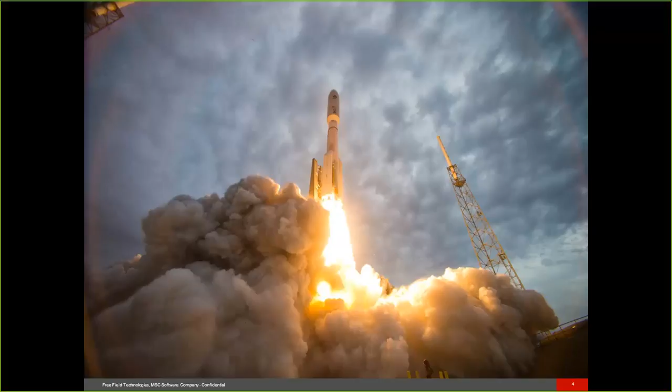The aerospace industry is very diverse, with a multitude of commercial, industrial, and military applications. More and more powerful rockets are required. They are used to reach longer distance or higher lift capacity. And because they are more and more powerful, the sound pressure levels generated at the launch are also getting higher around the vehicle.

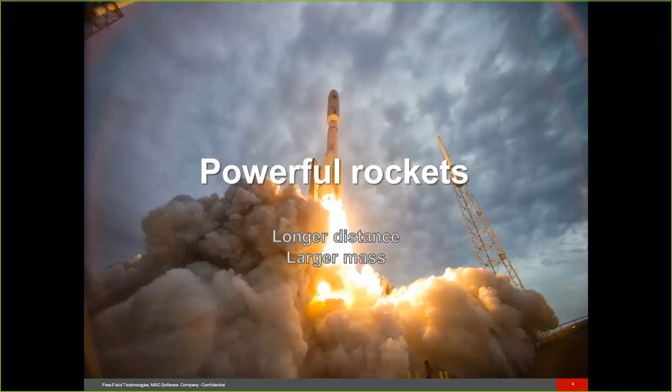Because of that, crew safety is crucial. The very loud sound generated at liftoff can cause permanent body damages to crew members. But it's not only to the human body that sound can cause damage. Louder the sound, higher the risk of damages to the launcher structure or the high technology components embarked. Indeed, the intense acoustic field submits the structure to high vibration levels, structure fatigue, and payload stress.

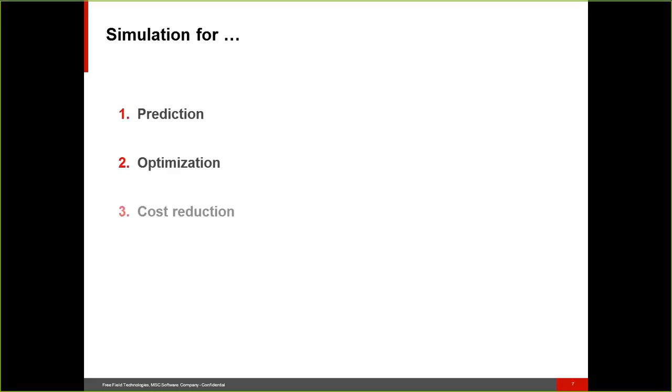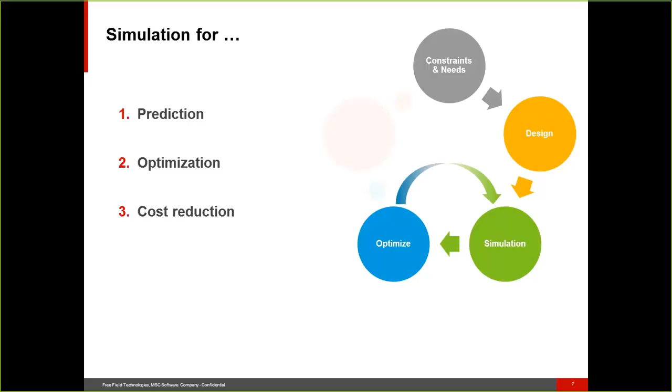The main challenges of the aerospace industry are therefore to model the vibro-acoustic problems and predict the vibration levels of structures submitted to intense pressure loads. In this context, simulation is the required tool for prediction, optimization, and cost reduction, so that for a given design cycle, you can efficiently iterate before the prototype building - a prototype that can now be the right one at the first shot.

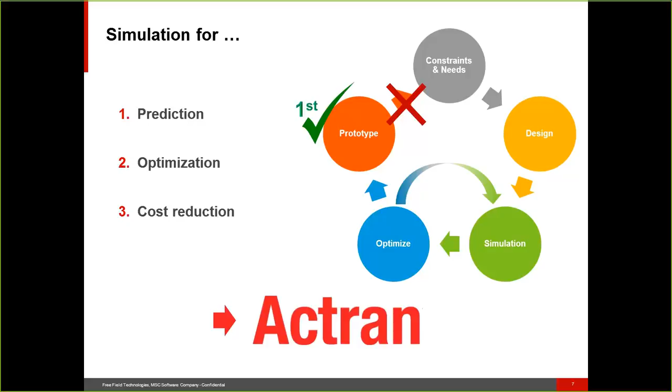Actran is a complete vibro-acoustic simulation software made for helping engineers in these tasks. Let's see how it handles the various vibro-acoustic challenges in the space industry. For each type of external noise source, Actran has an efficient corresponding numerical model.

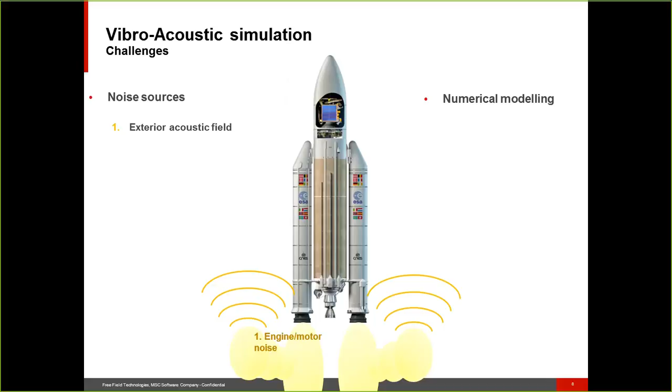Let's consider one of the first exterior sources, that is the acoustic field generated at liftoff due to the engine noise. This excitation can be seen as a broadband and random acoustic pressure. It is equivalent to a diffuse sound field.

The second source of vibration is not acoustic this time, but is an aerodynamic load due to the pressure fluctuations along the vehicle surface. These come from the small turbulent fluctuations in the boundary layer, which are predicted with the turbulent boundary layer model.

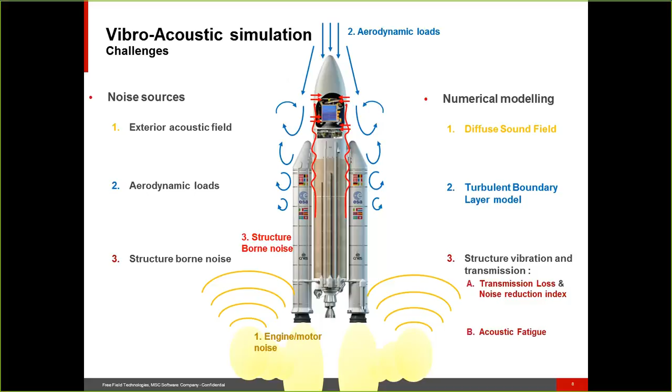Finally, the third type of external source is the structure-borne noise due to the structure vibration and the acoustic transmission. For that purpose, the acoustic insulation performances can be predicted via transmission loss and noise reduction index studies. In addition, the vibration levels and the induced constraint can be predicted and coupled to an acoustic fatigue analysis.

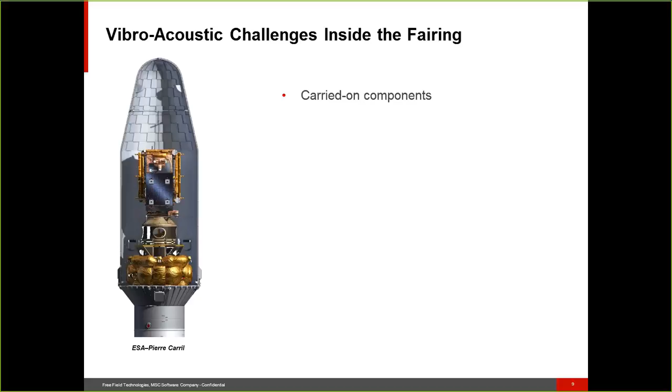But let's go inside the fairing and better understand the situation. The fairing is used to maintain a clean room environment for payload and precision instruments. In particular, it is the location where carry-on components such as satellites are stored. Such components have very fragile parts that are, for instance, antenna or solar panels.

Due to the different acoustic noise sources, a broadband pressure is generated inside the fairing. This broadband pressure is equivalent to a diffuse sound field. In order to correctly and precisely model the behavior of the carry-on component inside the fairing, we have specific modeling challenges. These challenges are the consideration of the installation effect, also named masking or edge effect, and a correct representation of the acoustic environment and loading, that is a diffuse sound field.

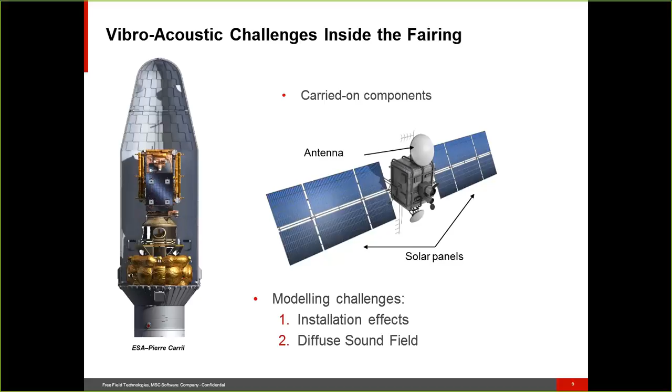The installation effects are related to the complex structure geometry. Because of this geometry, there are external surfaces that are not loaded by the incident acoustic field. To include the masking effect in your simulation, the fluid surrounding the studied object should be modeled.

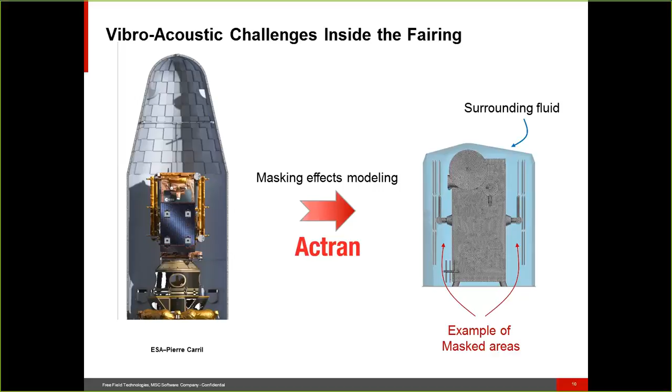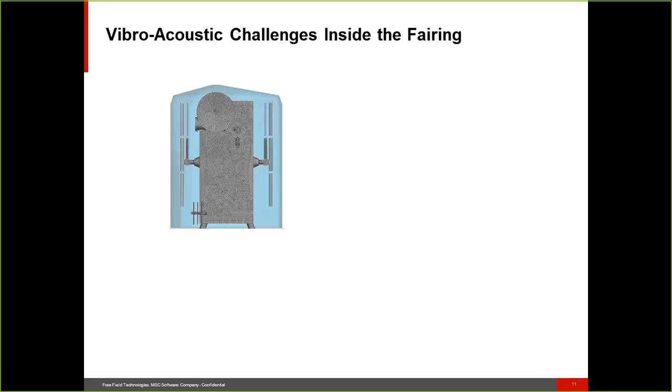We have seen that the broadband pressure inside the fairing is equivalent to a diffuse sound field. This diffuse sound field excitation is applied along the non-reflecting surface and represented by the superposition of a large number of plane waves with different orientation.

The generation of the plane waves is automatically done around the structure and equally spread around the reference sphere. The random character of the excitation is modeled by sampling random phases.

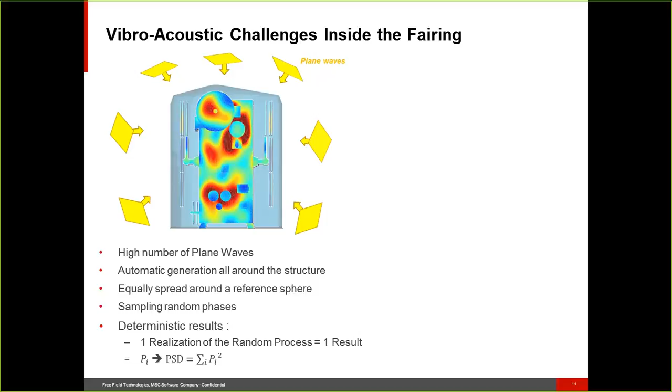The random excitation therefore becomes a combination of different deterministic results for which the phase of the plane waves change. One realization of the random process provides one result, and the PSD values are obtained by summing the square result. The convergence of the PSD therefore depends on the number of samples considered during the Actran computation.

PSD levels from experiments can also be used to define excitation levels. I draw your attention on an important point: only one Actran calculation is needed thanks to the multiple load analysis.

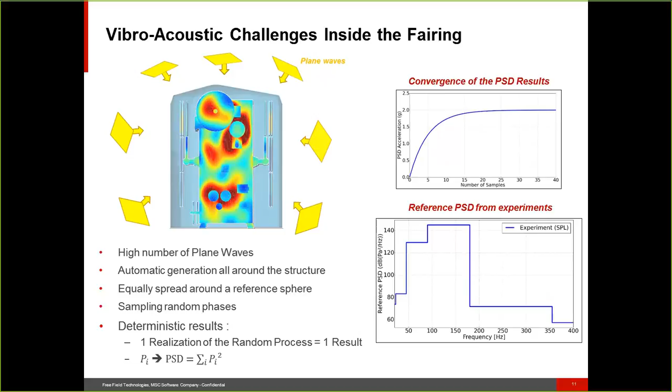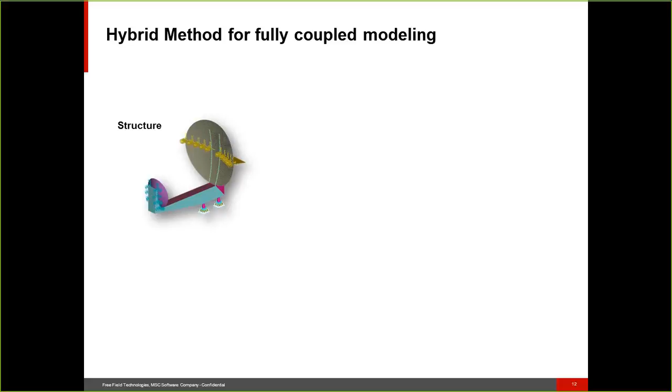The masking effect and broadband pressure modeling are used inside the hybrid method. The hybrid method in Actran relies on intermediate results provided by external tools for modeling the structure. The structure is in modal coordinate system thanks to a first modal extraction analysis that can be performed with Nastran.

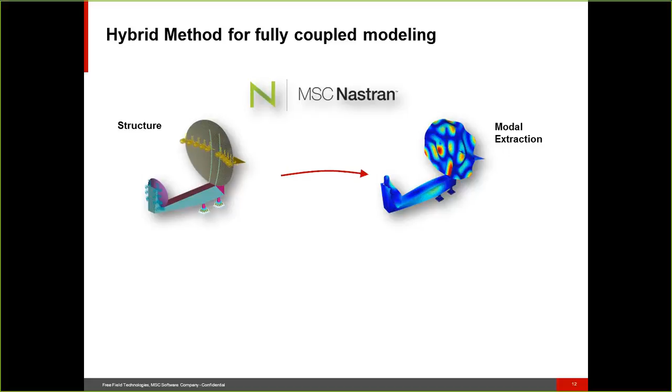The structure model and modes are then imported in Actran, and the model is made more complete by including specific acoustic excitation and components. Finally, a hybrid calculation is performed with Actran for a fully coupled vibro-acoustic study, including a structure in the modal coordinate system and acoustic components in the physical coordinate system.

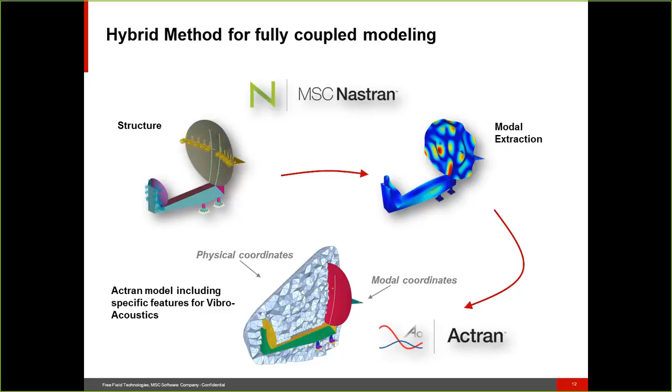Thanks to our automatic and adaptive acoustic components, the exterior fluid is not necessarily meshed by the user. Including meshing tools are indeed available in the graphical user interface and the Actran solver.

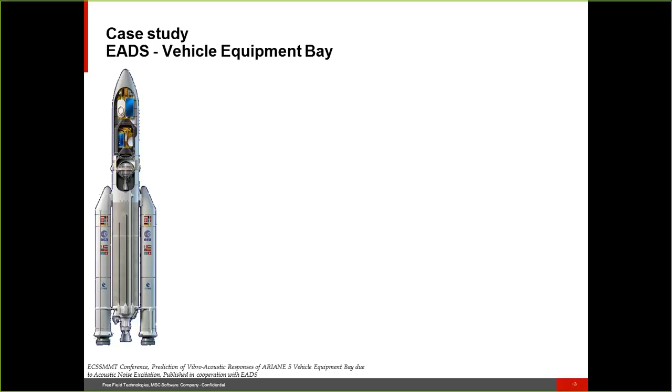This methodology has been successfully applied during different studies. One of them was done in collaboration with EADS, where experimental results were compared with numerical ones. The study consisted in predicting the vibration levels on the equipment bay of the Ariane 5 vehicle submitted to a diffuse sound field. The equipment bay is the brain of the launcher, and any damage needs to be prevented.

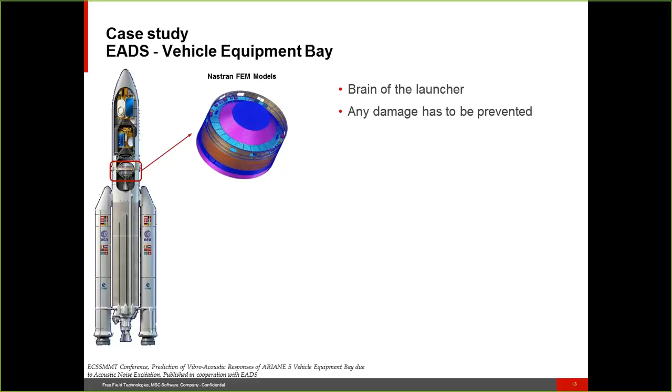A finite element model of the equipment bay structure has been built and submitted to a diffuse sound field. Numerical results were compared with experimental ones, showing excellent correlation over the complete frequency range of interest.

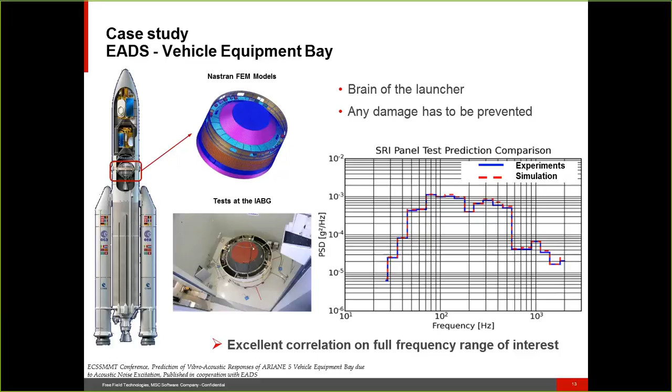The methodology used to study the vibro-acoustic response of this antenna is the hybrid methodology, where Nastran structure model and modes are used to build an Actran model. We will see how the new Actran diffuse sound field wizard eases and speeds up the building of the Actran analysis.

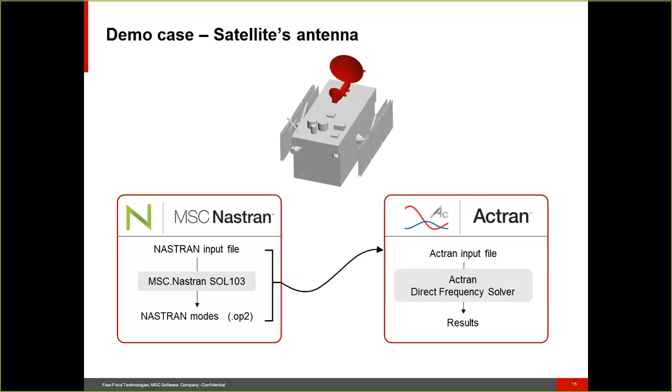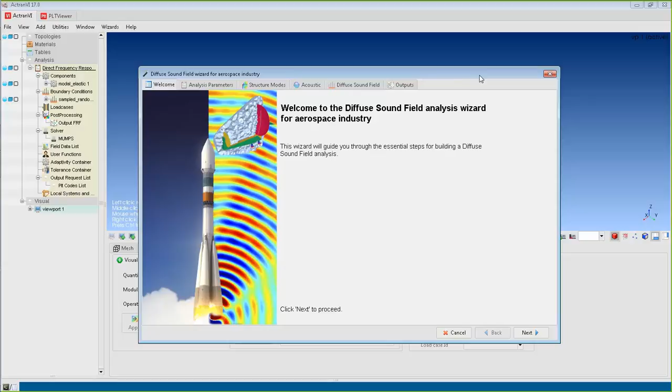So when you are in Actran, to open the new wizard, go in the top menu bar in the wizard section and select diffuse sound field wizard. A window opens and welcomes you to the diffuse sound field wizard for aerospace industry. To start building your analysis using the diffuse sound field wizard, simply click on Next.

The first stage is the analysis parameters definition, that is the frequency used for your computation and the gravity constant that will be used if you ask solid acceleration in G-unit. So in my case, I will define a linear progression of frequency starting at 20 Hz with a step of 2 Hz and going up to 1000 Hz.

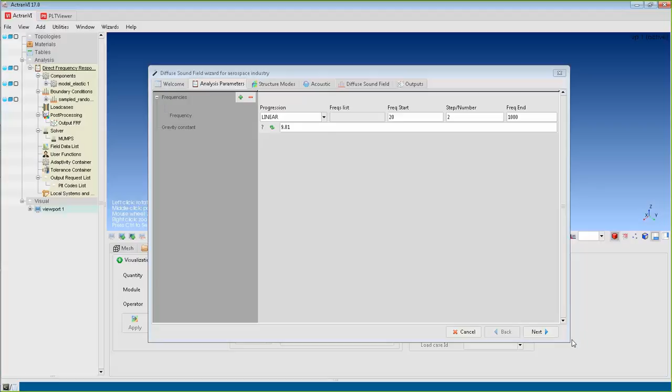Once you have finished defining the first analysis parameters, click Next and proceed to the structure mode definition. In this section, I will provide the mesh of my structure and the corresponding modes that I have already extracted. In my case, I'm using Nastran BDF mesh format, and I need to provide a path to the BDF file.

Once it's done, Actran is automatically loading the structure mesh in the background. In addition to this mesh, I will also provide the modes, which in my case are stored in a Nastran OP2 file, and I will provide a path to this file.

I can then select the number of modes I want to consider in my computation. In my case, I do have 323 modes, and I'm applying a global structural damping over all the modes, using a value of 5%. Once the structure mode definition is done, simply click on Next to move on.

Now we are in the acoustic panel definition. As we want to consider the masking effect, we know that we need to model the surrounding fluid around my structure. For that, I need a closed surface around it.

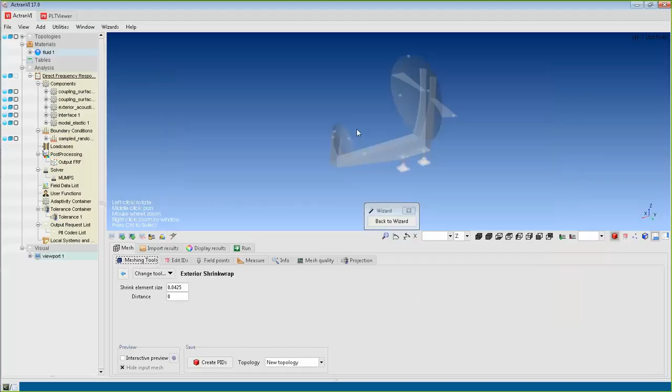To do so, I will use the shrink wrap tool, and I will select New in order to create a new closed surface around my structure. When I do that, the wizard gives me the possibility to use the graphical user interface and its meshing tools. I need to select the structure element around which I want to create my closed surface.

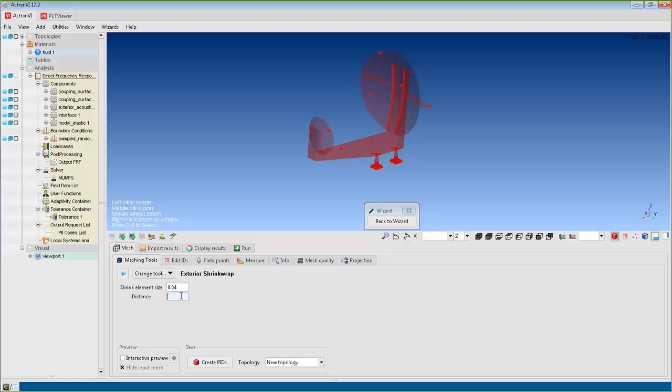I need to specify a certain acoustic mesh size. In my case, I'm using a 4 cm element size. And I need to specify a certain distance between the acoustic and the structure. I will use 1 cm.

Once you have finished defining your parameters, you can make an interactive preview of the results. And if it suits your needs, simply click on Create PID and you go back to the wizard.

Then we need to define the thickness of the acoustic domain, so the thickness of the surrounding fluid around the structure. We will use a 20 cm thickness. I will keep the material definition as it is because my model is in SI units.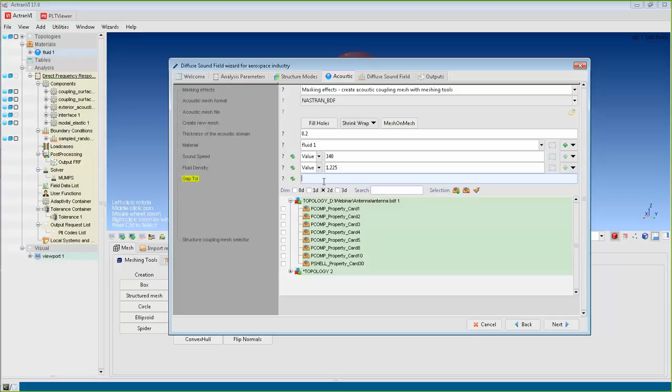In order to couple the acoustic with the structure, we need to define a gap tolerance value. As we have an acoustic mesh distant 1 cm from the structure, we need to provide a 1 cm gap tolerance value. Then you need to select the structure elements you want to couple with the acoustic. In my case, I will select all the 2D element surfaces.

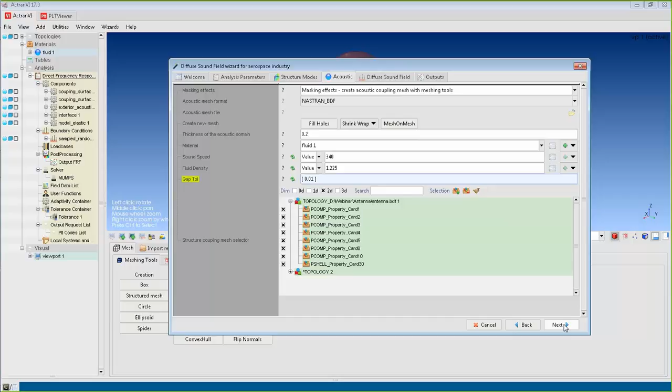Okay, so now we have finished the acoustic definition and we can proceed to the next step, that is the diffuse sound field excitation definition. In order to model the in situ case,

we can define a PSD value by table. In my case, I already have a table in text format that contains all the PSD values as a function of frequency. So I'm selecting table, import existing table. The table format in my case is TXT, but you could use CSV as well. And I will select my PSD table.

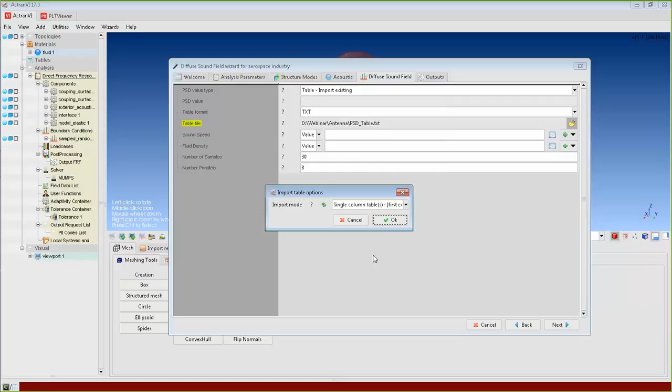In this table, I have PSD values for each octave band defined in dB. So I can keep the interpolation octave. But in order to tell Actran that I'm using dB values, I need to provide a reference dB value, which in my case, as I'm in SI units, is the typical Pascal value. The convention is quadratic because we are using PSD values. I do not need any band normalization.

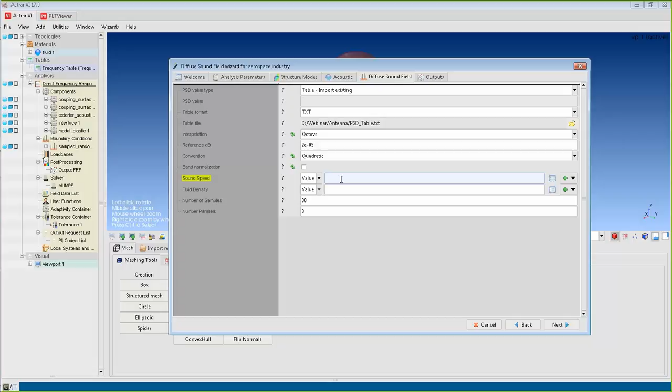Now I need to define the sound speed and fluid density. These values will be used to generate the plane waves in order to create the diffuse sound field. As I'm in SI units, I will use the typical values for sound speed and fluid density.

And finally, remember that we are using a sampling strategy to generate the diffuse sound field. So you need to provide a number of samples, which is 38 by default, and that is enough in our case, and a certain number of parallels that will be used to create our plane waves around the structure.

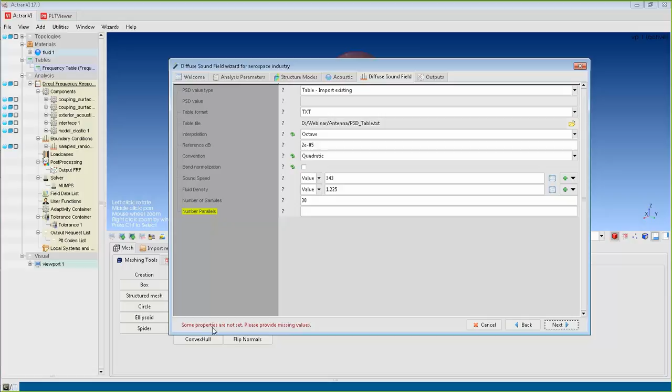For you to know, if you forget to define any of the inputs and you want to move on to the next stage of your definition, you are blocked by the wizard. The wizard tells you that some properties are not set and missing values need to be provided. So in my case, I did not provide any number of parallels, so I will correct this, and now I can move on. This mechanism is made to be sure that you are not forgetting any of the inputs in your analysis definition.

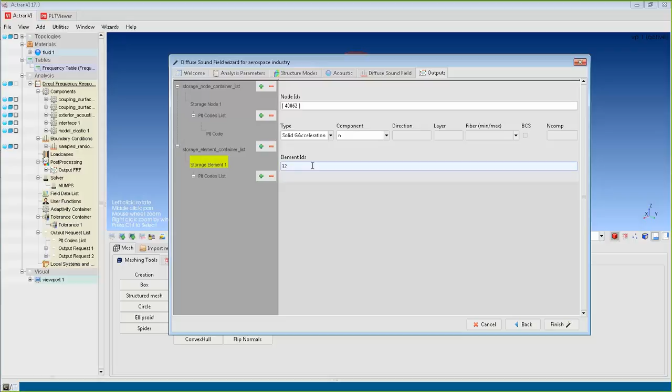In the final stage, I will define the outputs I need. In my case, I will define one accelerometer at a certain node. I already know the node ID of my model. On this node, I will ask for the solid acceleration in G units along the normal. And in addition to this accelerometer, I will also specify an element on which I want the stresses.

So I provide the ID of my element. Then I ask specifically the solid stress, and I will ask the solid stress using the von Mises formulation on the maximum fiber of my composite.

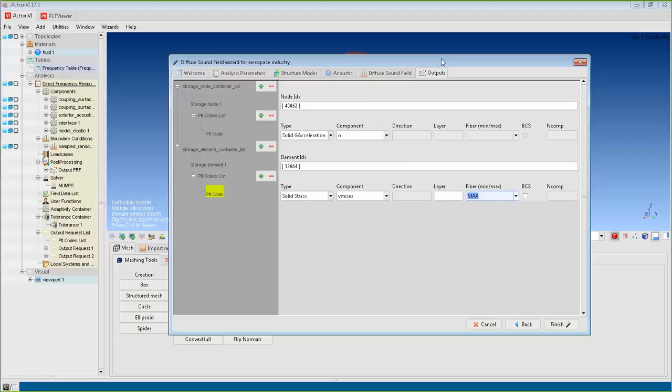So I finished the different stages of the wizard. I can click on finish.

When I do so, I come back to Actran VI, where I see that in my topologies I have the structure that I have defined, the acoustic mesh that has been created, and all the component analysis we have defined, as well as the boundary condition and the post-processing requests. So this model is ready to be launched, but we can also include additional components if we want.

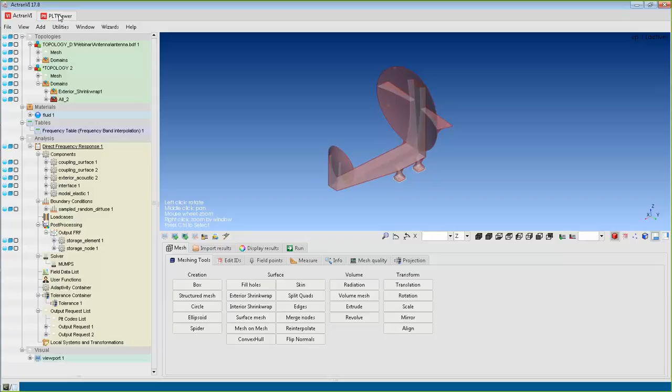Once you have launched the computation, you can post-process the results using the PLT viewer, where you can plot the von Mises stresses on the elements I have specified, or the normal acceleration at my accelerometers.

So, at this stage, we have seen that the aerospace domain is a highly demanding industry, requiring specific tools, and more particularly simulation, to design efficient structure. Specific modeling challenges need to be overcome, and Actran, thanks to its rich Vibro-Acoustic capabilities, can answer all of them.

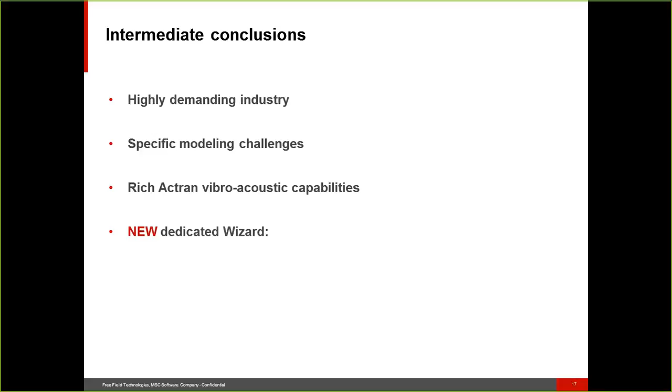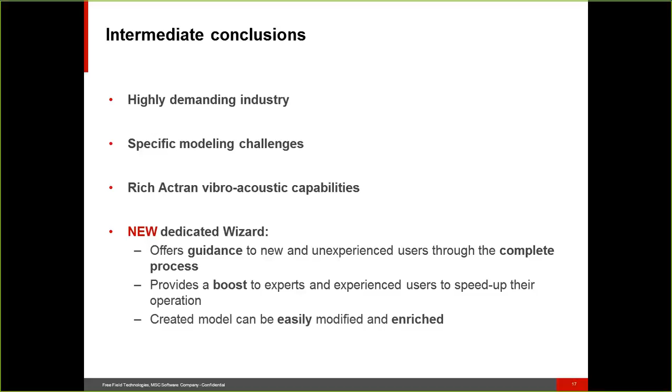The new Actran Wizard for aerospace applications offers guidance to engineers in order to easily and efficiently build up a complete Vibro-Acoustic model. But it also provides a boost to experts and experienced users to speed up their operation. The created model can be easily modified and enriched inside Actran VI.

Until now, we have seen how deterministic models help to design space structure and components. We have discovered the new wizard and seen how it helps to create your model. But in order to study models' robustness and consider uncertainties in your computation, additional tools are needed.

This is why we are pleased to introduce the non-parametric variability method. The best way to describe this method is by analyzing its name.

Let's focus first on the term variability. The variability is the sum of two characteristics: the sensitivity and the uncertainty. The sensitivity is a well-known characteristic that can be seen as the ability to react to a certain change.

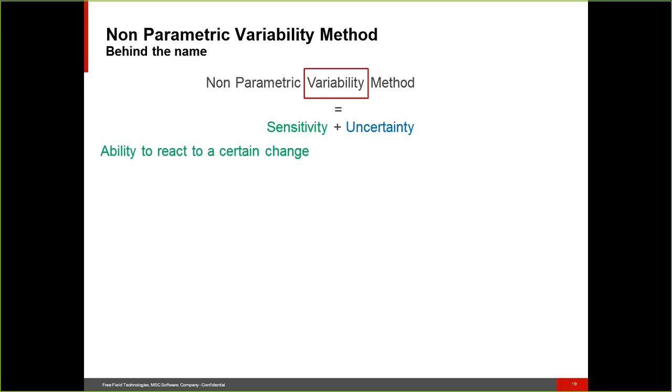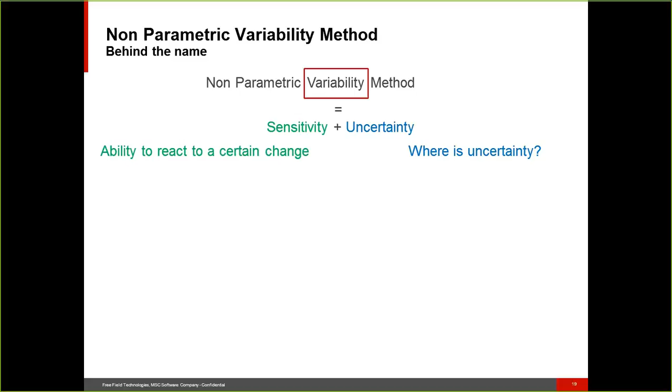But when we talk about uncertainty, the interesting question is, where is uncertainty? Indeed, there are several sources of uncertainty. If we have a look at a satellite, one of the first sources of uncertainty is in manufacturing.

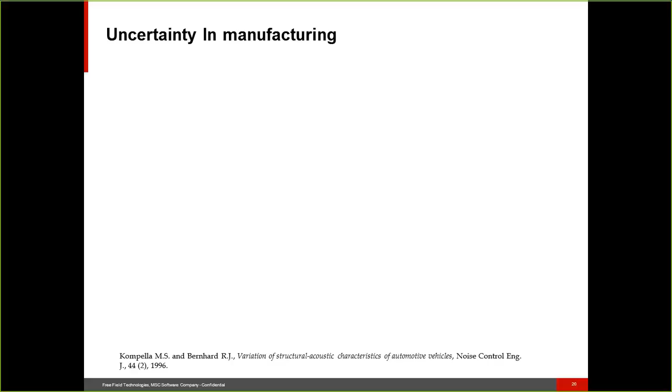The first illustration of uncertainty in manufacturing was done by Kompella and Bernhard in 1996, when they compared several frequency response functions of one vehicle to 57 identical vehicles.

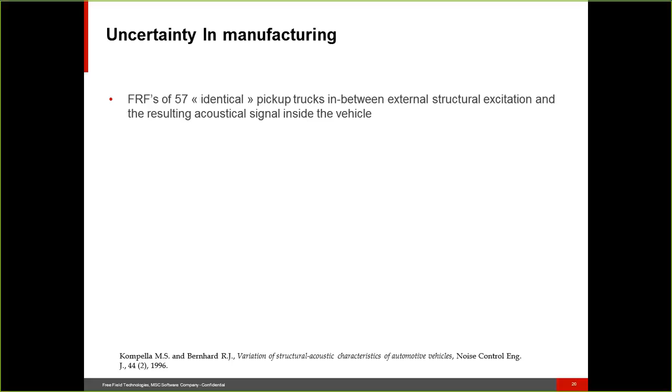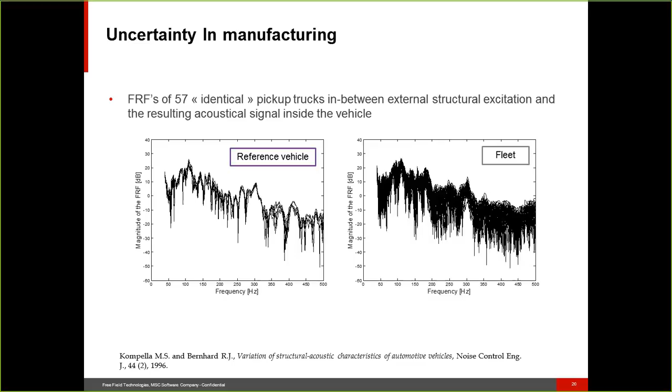By making the comparison of the frequency response function, they could see that differences were coming first from the environment, so in the way the frequency response function was measured, but most of the differences were in between the reference vehicle and the fleet, showing the impact of manufacturing on uncertainty.

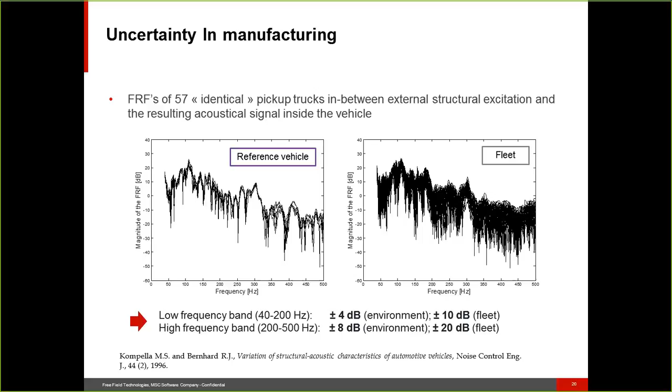Of course, for your application, manufacturing uncertainty will not be as important, thanks to the high precision tools that are used.

But uncertainty also occurs in the transition in between reality and virtuality. Indeed, during the virtual model building process, a first source of uncertainty will be the mathematical modeling.

It can be, for instance, the choice of the governing equations used to describe complex composite solar panels. In addition, the choice of numerical simulation technique might also lead to uncertainty. It is, for instance, well known that boundary element methods cannot consider strong fluid-structure coupling.

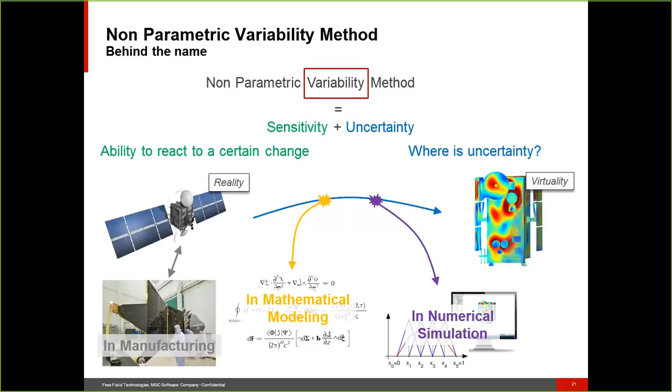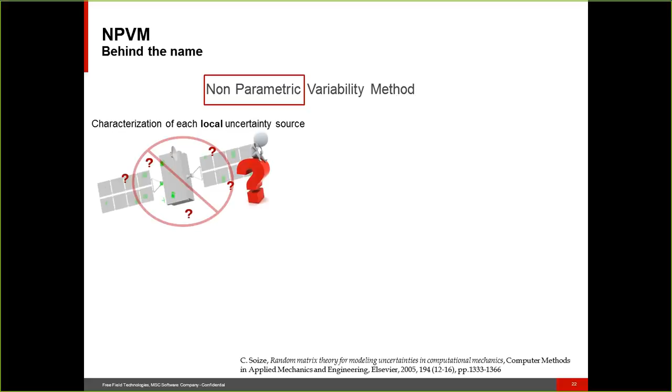The non-parametric term derives from the way variability is introduced in a numerical model. Indeed, instead of making the characterization of each local source of uncertainty, we go for a global approach, where variability is added at a global level. So what does it mean?

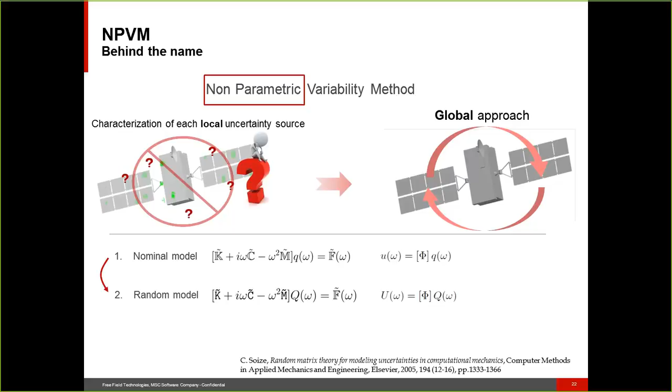Well, we start from a nominal model, that is your current model, described by its system in modal coordinates, and we build based on it a random model. To do so, random matrices of stiffness, mass, and damping are created using a sampling strategy.

Knowing what the method is, let's see why we need it. Let's have a look at a typical response indicator in the frequency domain, and in particular observe how this response varies with frequency. We can clearly highlight three main regions: the low frequency range, the mid frequency range, and the high frequency range.

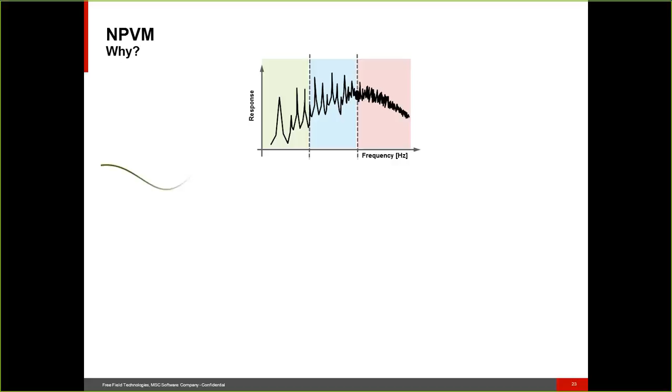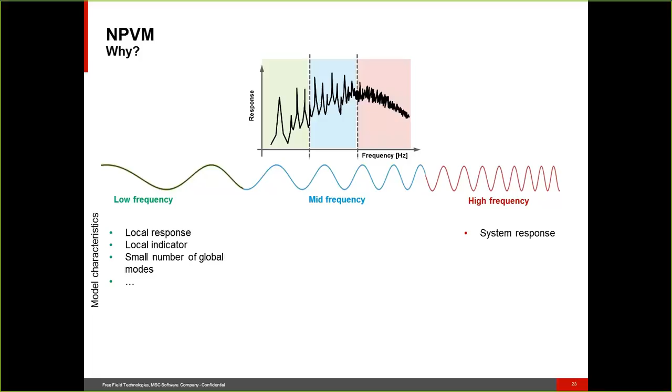In terms of model characteristics, at low frequency we typically look at local response thanks to local indicators, for instance the acceleration at one particular point on a structure. In addition, we have a small number of global modes. On the opposite side, at high frequency we look at system level response thanks to energetic indicators, for instance average vibration levels on a plate, and we have a large number of local modes.

So when going from low to high frequency, passing through the mid frequency range, local mode effects become more important. By nature these modes are sensitive to model details, material parameters, and discrete scheme. So the sum of sensitivity and uncertainty is increasing the variability of your model.

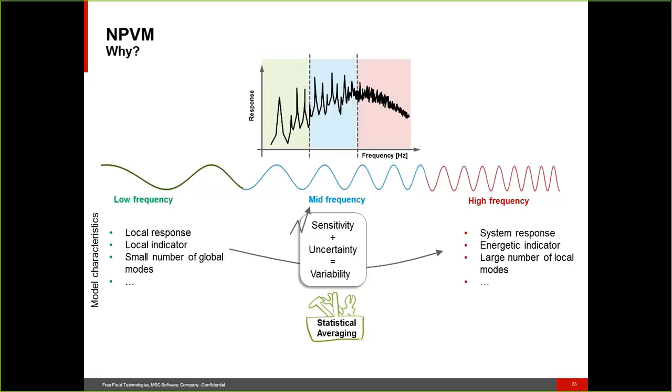In order to consider the variability on your model, specific statistical averaging tools are needed. This is why we have introduced the non-parametric variability method in Actran.

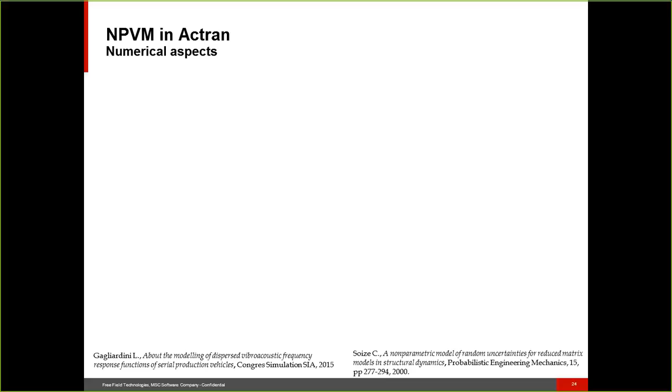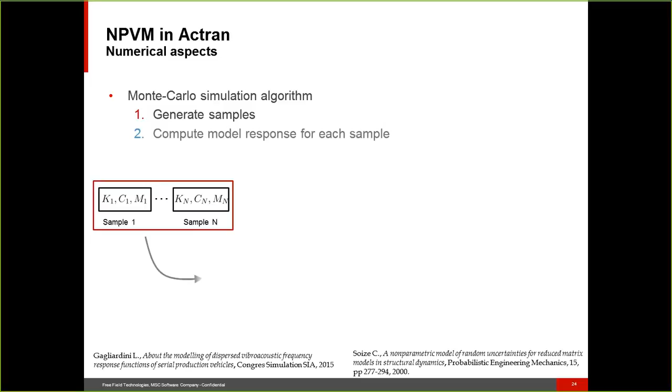On a numerical point of view, the NPVM method is based on a Monte Carlo simulation algorithm. It consists of three steps. First, samples are generated for each matrix to create the random character of the model. For each sample, the response is computed. And finally, the sample results are combined through statistical operations.

The results of this method are of two kinds. You can access the mean response over the samples—this mean value will be different than the nominal response obtained without using the NPVM method. But you can also access confidence intervals of the results, allowing you to assess the robustness of the model.

Because we are using a Monte Carlo process, the cost of computation is significantly increased. This method has been under development by universities for 15 years and has been applied on industrial applications by Mr. Gagliardini at PSA.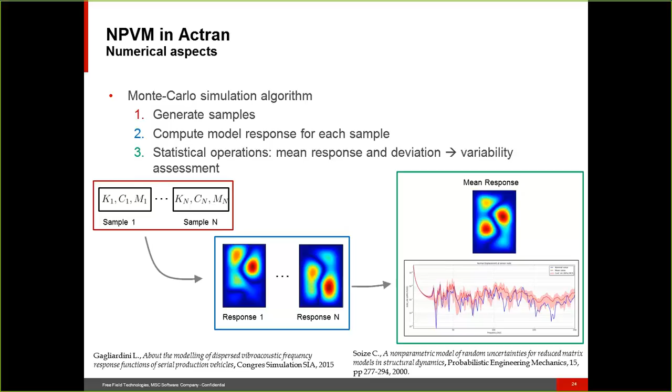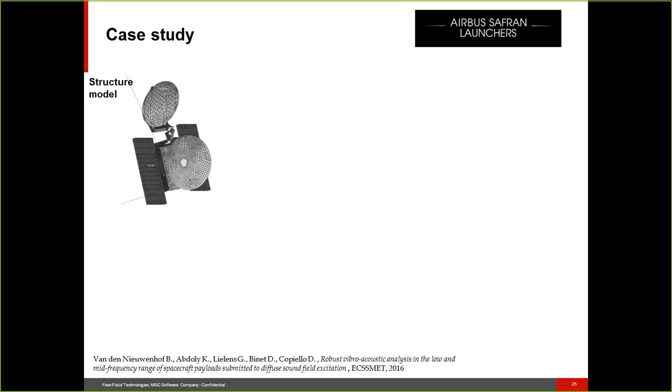This new tool has recently been applied on an industrial model of Airbus Safran launchers. A similar hybrid methodology was used to compute the pressure field loading the structure, starting from the Nastran structure model and moving through a vibro-acoustic simulation in Actran.

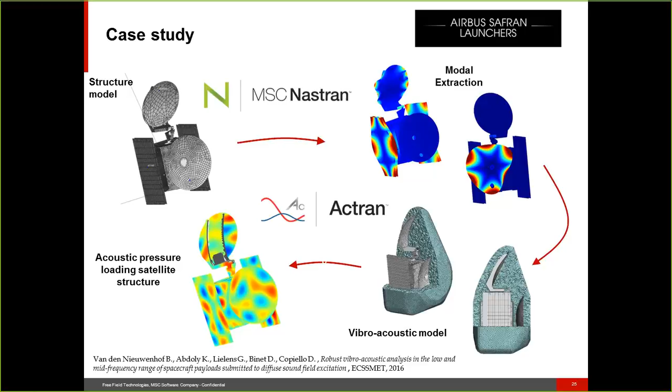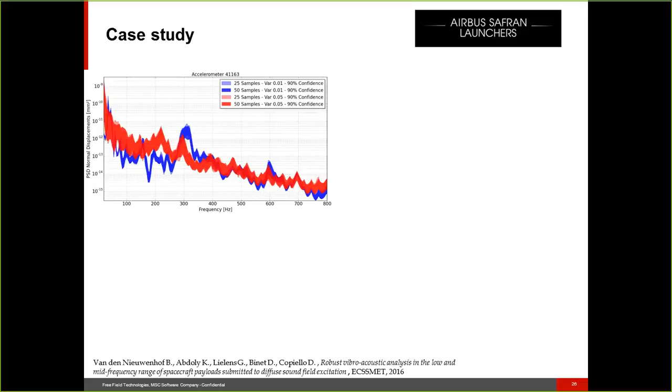Different result types were studied. First, the convergence in terms of Monte Carlo samples was examined. Second, the impact of variability level on indicators such as vibration levels or injected kinetic power was performed.

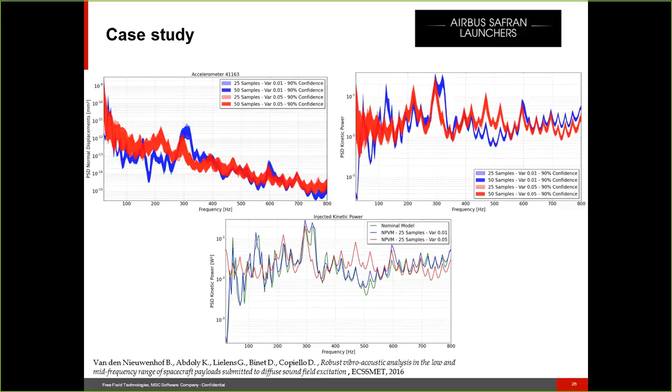As expected, the average nominal model response, shown in green in the bottom picture, is different from the two NPVM ones. This difference depends on the variability level, showing the impact of variability on the final response.

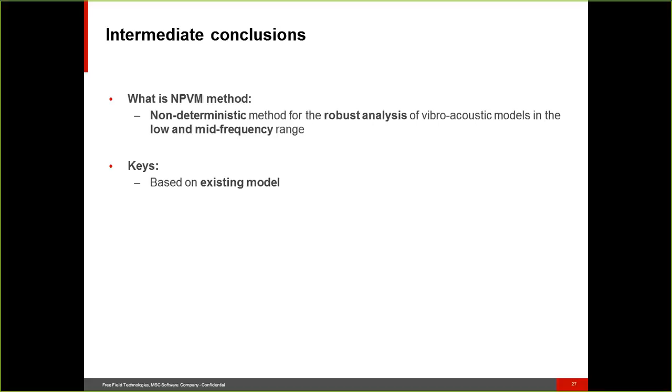At this stage, we've seen what the NPVM method is. It's a non-deterministic method allowing you to study the robustness of vibro-acoustic models in the low and mid-frequency range. This method is based on your existing model already available, and the characterization of uncertainty is done through a single and few set of global parameters.

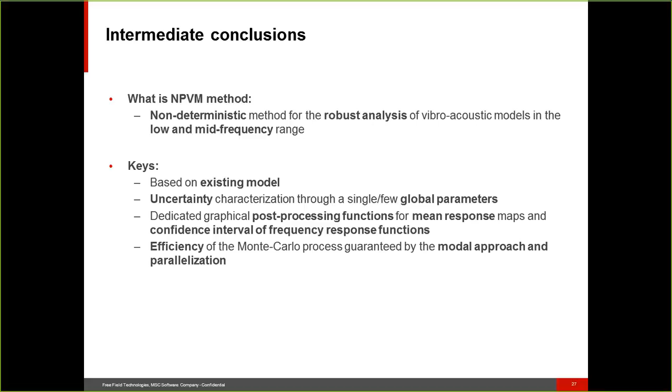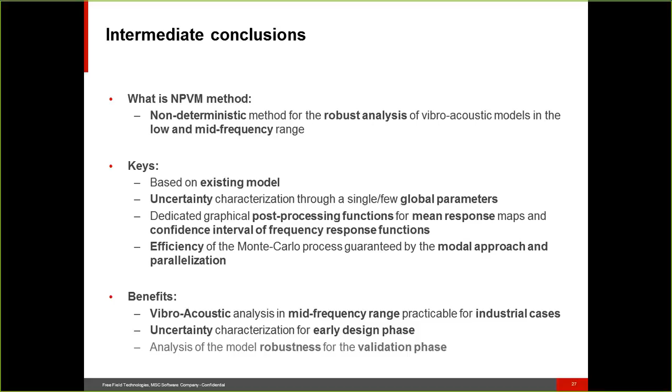Thanks to this method, vibro-acoustic analysis in the mid-frequency range is now practicable for industrial cases. You can now characterize uncertainty during the early design phases of your project, but also analyze the robustness of the model during the validation phase.

During this webinar, we have seen that the context around the aerospace industry requires being able to prevent any structural damage. For that, being able to predict behavior is an asset. Actran and its rich vibro-acoustic library offers all the tools you need to answer your needs and help you in your work.

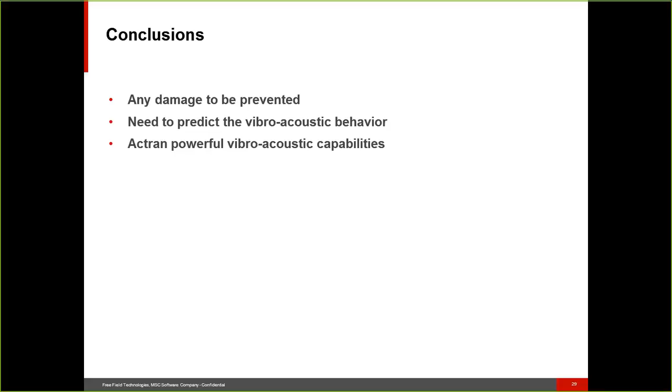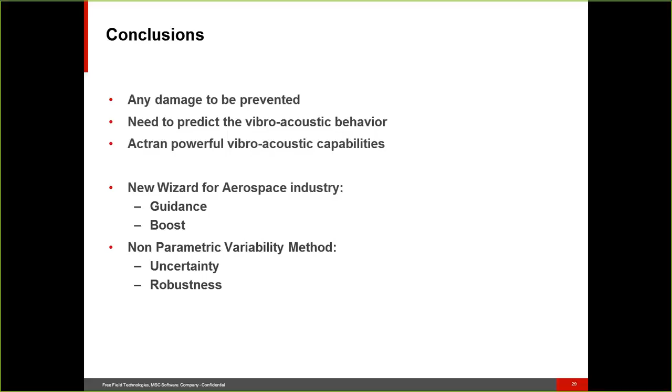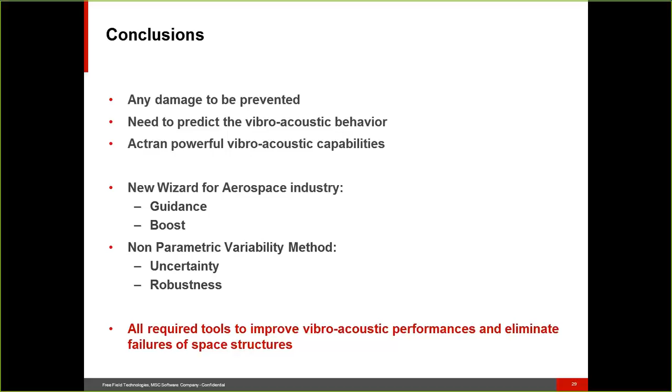Specifically, the new wizard dedicated to the aerospace industry will help new engineers set up their models and will offer a boost to experienced users in their day-to-day work. In addition, with the help of the non-parametric variability method, it will now be possible to consider uncertainty at the very first design phases, but also assess the robustness of the models at the end of the validation process. All the required tools to improve vibro-acoustic performance and eliminate failures of space structures are now available.